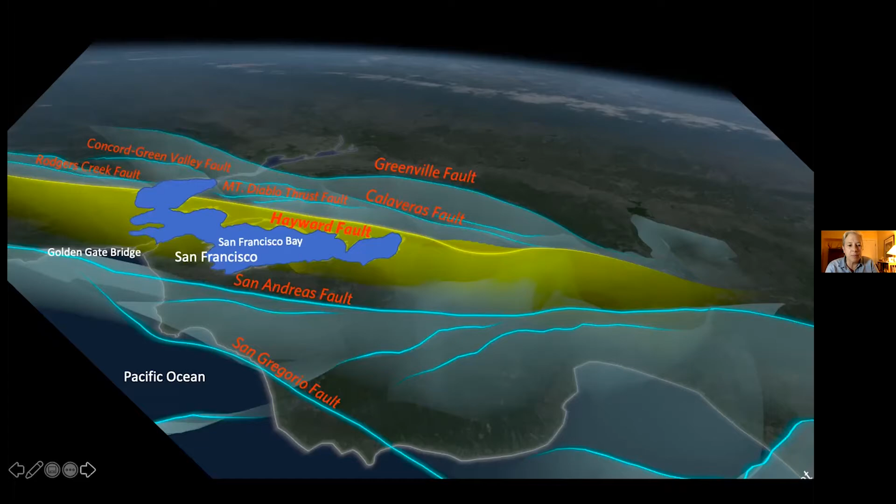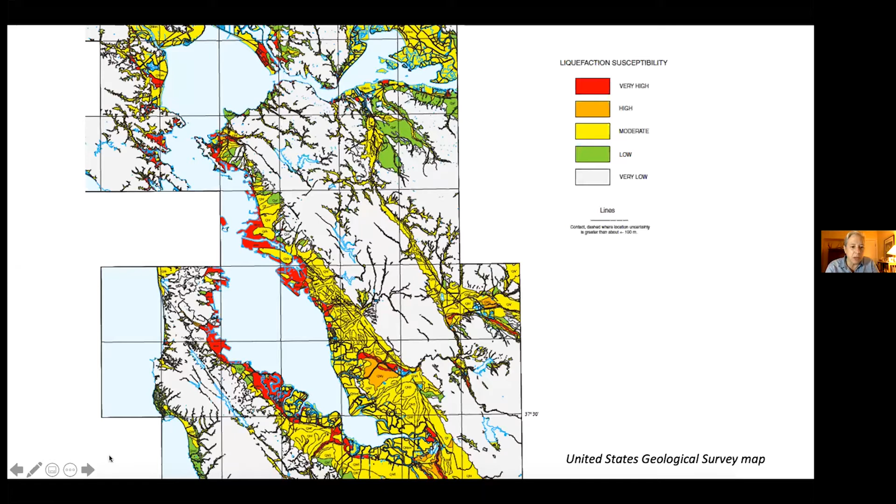That's what we're concerned about with rising sea levels and rising groundwater — that we may find ourselves in a situation where the soil behaves like a liquid. As sea level and groundwater continue to rise, more and more areas could be affected by this dynamic. Sorry, I'm trying to move forward here.

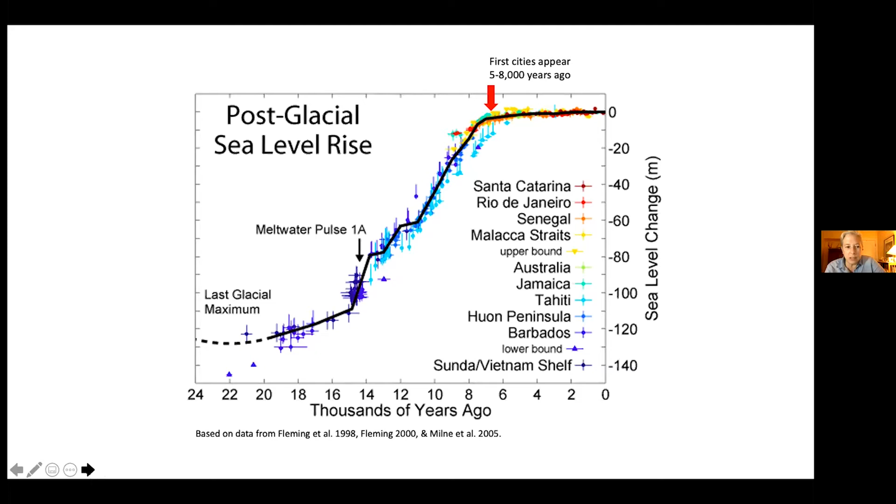So we've never actually operated cities during a period of rapid sea level rise, even though rapid sea level rise has occurred before. We're trying to figure this out, and no one really exists who can give us a lot of advice about it. It's difficult, and it's something humans haven't had to do before with cities. This is the guidance the state of California has given public agencies about how to think about sea level rise, and it's different from the guidance given in most European countries that I'm aware of.

We believe we're pretty much committed to that based on how much CO2 is in the atmosphere. The question is when will we get there. So they say permanent investments should assume the scenario of 1 meter of sea level rise by about 2050.

Smaller investments could use the medium-high scenario of 1 meter by 2068, and low-cost, temporary or very short-term investments like a path or a new public toilet in a park could use a low scenario of 1 meter by 2096. This helps give context, since not every country uses the same estimates for sea level rise, and in the United States, each state gives guidance for what public agencies should anticipate.

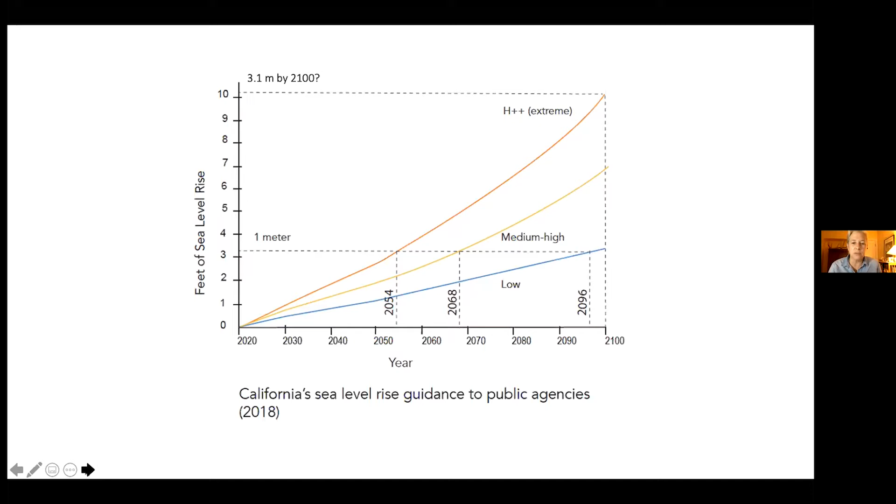What's interesting is that these two marsh grasses have hybridized—they've combined, reproduced, and fertilized each other, producing a daughter hybrid plant that's more vigorous than either parent, which isn't unusual for hybrids. This creates a taller, stiffer, stronger marsh grass. This hybrid has been 95% eradicated, removed physically and with herbicide treatments around the entire 1,000 miles of the Bay Edge, because of a kind of ecological purism about what species are characteristic of the region.

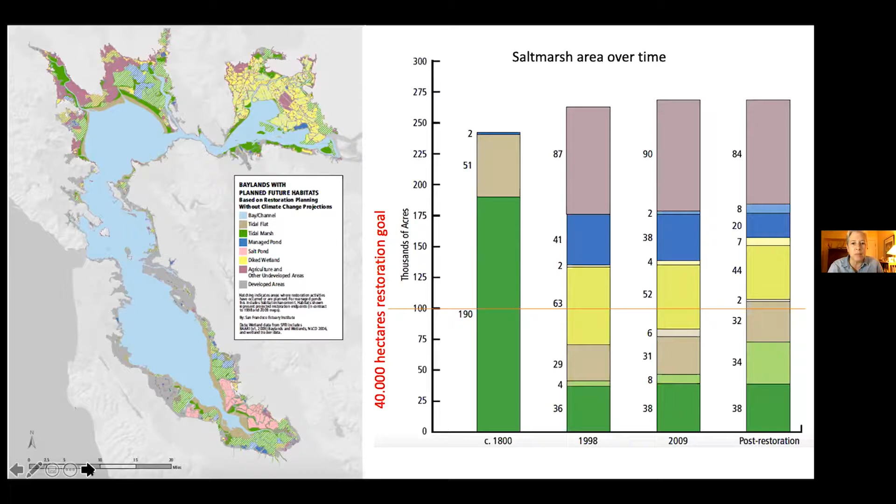Now I want to talk about groundwater rise, which is a big concern here because of its association with liquefaction, as well as other kinds of flooding. I'm sure you're talking about this to some extent also in Denmark.

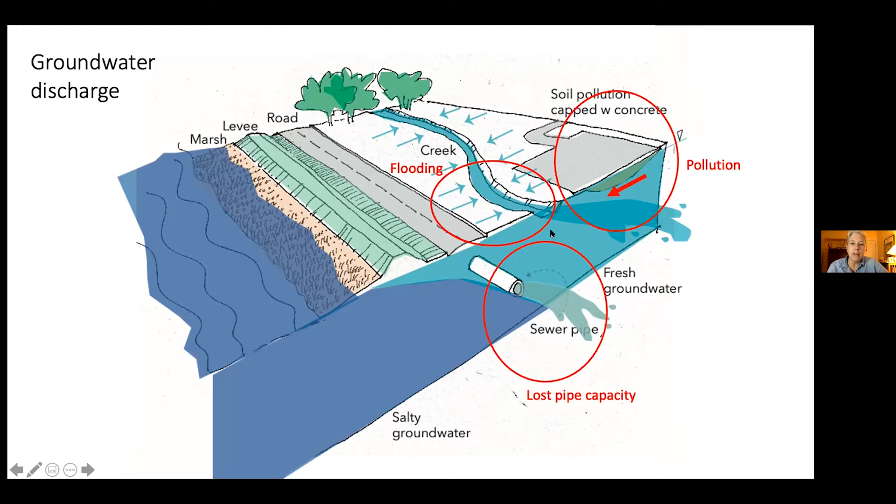So all of this will happen: the lost capacity in storm sewer pipes and sanitary sewer pipes that carry human waste, the remobilization of cancer-causing soil pollution, the flooding in the creeks, and eventually emergence of that water as flooding at the surface.

This is all happening in spite of the fact that there's a dike along the water's edge, because without extensive pumping networks, there'll be no way to prevent groundwater from rising behind a seawall or dike. That's why there are extensive pumping networks in many coastal areas. There's no way this structure can prevent this deep and lateral dynamic from occurring, since this water comes from rainwater coming from all the areas uphill, and that can't be blocked.

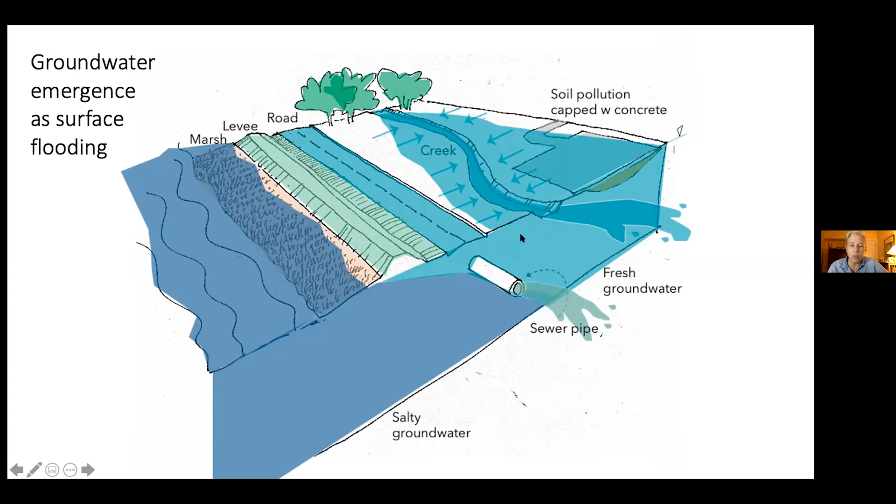We tell ourselves that this dry crust of land is going to stay dry, but in fact, it's not. As it gets wet, it's going to be very, very expensive to maintain, and systems—electrical systems, sewer systems—are going to begin to fail.

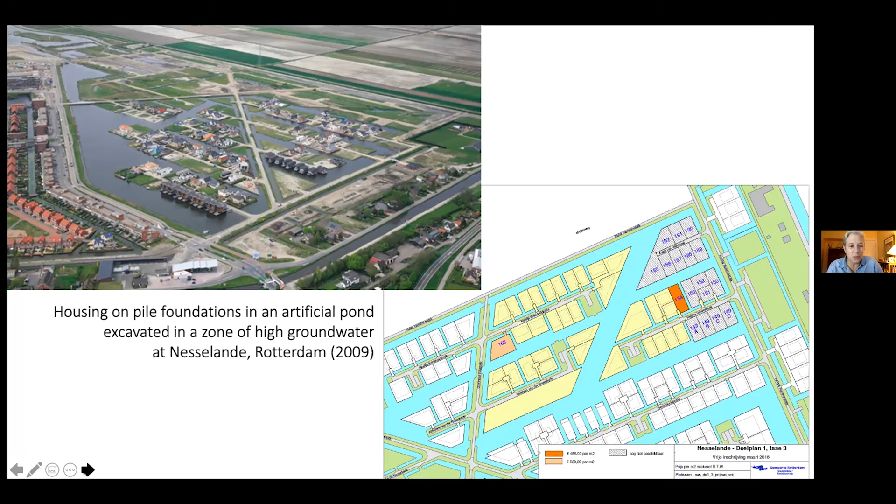It also puts the most secure and entitled people in a situation that might be a little more innovative. I don't want to say risky, but if they see a little crumbling in the dike, they are absolutely going to call someone. Whereas if we put innovative infrastructure in an area where people are poor, and it's a single mother with 3 or 4 children who works 2 jobs, she's not going to feel entitled to call and complain. So it's kind of the ultimate monitoring device to put wealthy people in an innovative infrastructure context, because they will absolutely call and complain if something seems to go wrong. So that may be an important insight for us.

So what we're thinking of, in a kind of cartoon version, is to excavate ponds and place that material at the wetland edge to add to the elevation of our wetlands. Dig hole, make mound, but also allow canals and moats here, and then float modular buildings in these areas, which otherwise many districts along the bay are going to lose value completely.

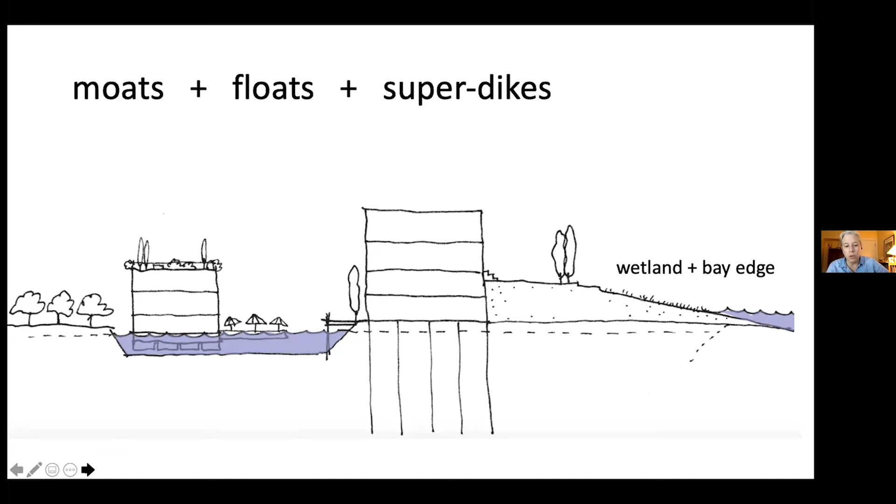We're looking at the Dutch examples because they represent a way of living with high water. I'll show you a quick video of how we talk to the public about this—an example of a student using claymation in one of my classes.

We might excavate these two, three, maybe four meters to build floating foundations of shared decking—not individual units floating, but a shared deck—and then modular units placed on that shared decking for new residential districts, with a pedestrian pathway around the district.

We think these kinds of strategies may work for many parts of the Bay Area edge. This is the drawing we used in a professional competition to explain: we're talking about not just one pond, but a mosaic of tidal ponds, like a honeycomb spread out—lots of ponds, a network of them, an armature of dikes surrounding these excavated ponds.

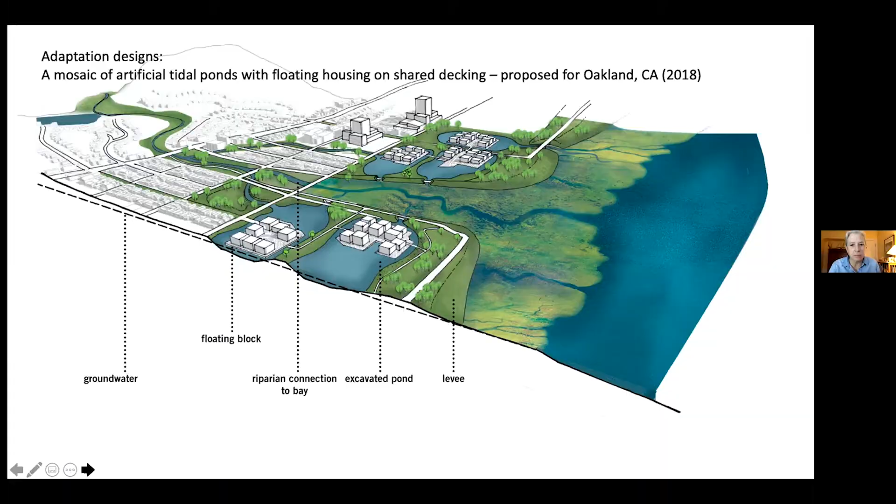This is another illustration of a similar situation, where there's already a long dike and a wetland on the outside of the dike and pump stations on the inside. Here we're talking about adding density as we add this floating district.

The student was showing even a floating soccer field here, which I don't know if we could actually justify the cost of, but it would be fun. And then we'd be providing habitat for an unusual bird that lives in the marsh, and also other species like the salt marsh harvest mouse, which is federally endangered.

So we're trying to figure out how to maintain this biodiverse edge, how to provide continued housing in an area that's going to turn into a soup without causing subsidence, and in a way that prepares us for earthquake events.

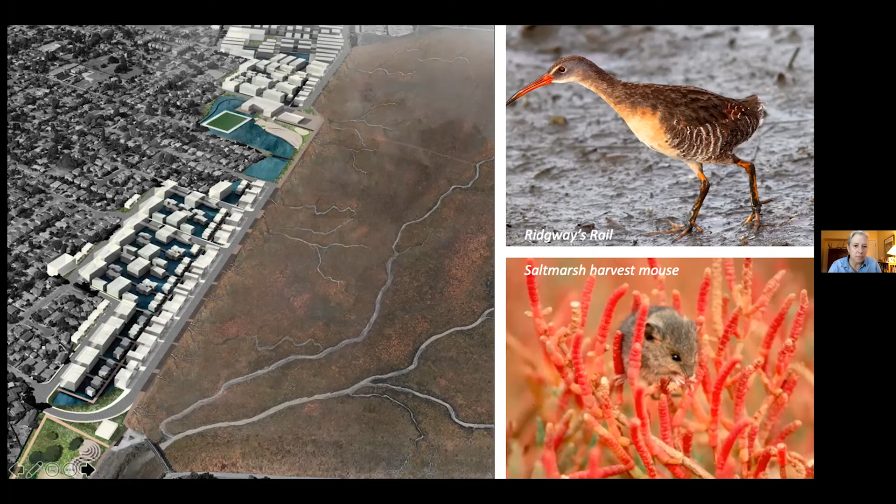This is another example, one we entered into a competition in 2018. It shows the excavated pond again, the high water table, the floating modular units on shared decking. Here are some buildings that would probably have to be more like 15 or 20 stories high to justify the cost of very expensive pile foundations that would prepare them for an earthquake.

When we show these images in the context of the places at risk around the Bay Area, right now the places that face the most risk are filled with lower-income people who, because of systemic racism, were forced to live in these areas that used to be industrial. They weren't allowed to move to other neighborhoods, which were maintained as white neighborhoods.

That segregation, that housing restriction, left a lot of people who are still low income and have less access to education and suffer more from air pollution of the highways that come along the Bay Edge, left them vulnerable to this rising groundwater phenomenon and the health risks associated with remobilized soil contamination. So this is a dynamic that's happening possibly today, underground, unknown, and unmonitored in our lowest income neighborhoods where African-American families live and Latino families.

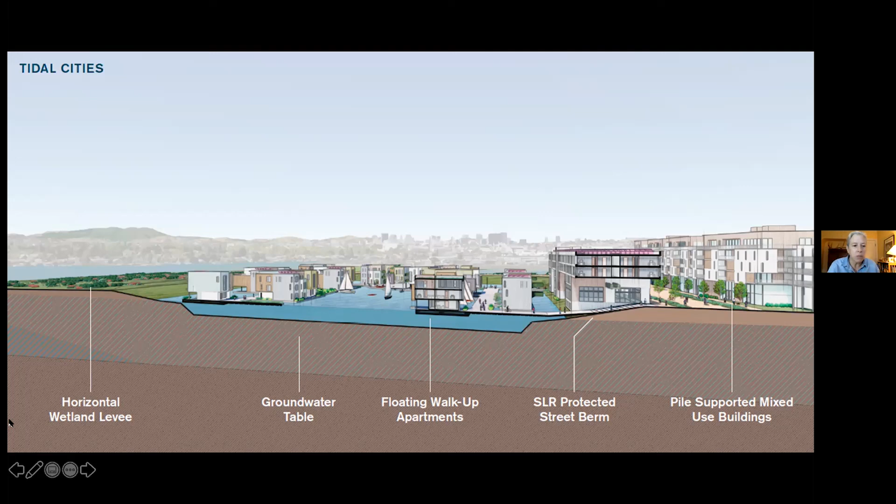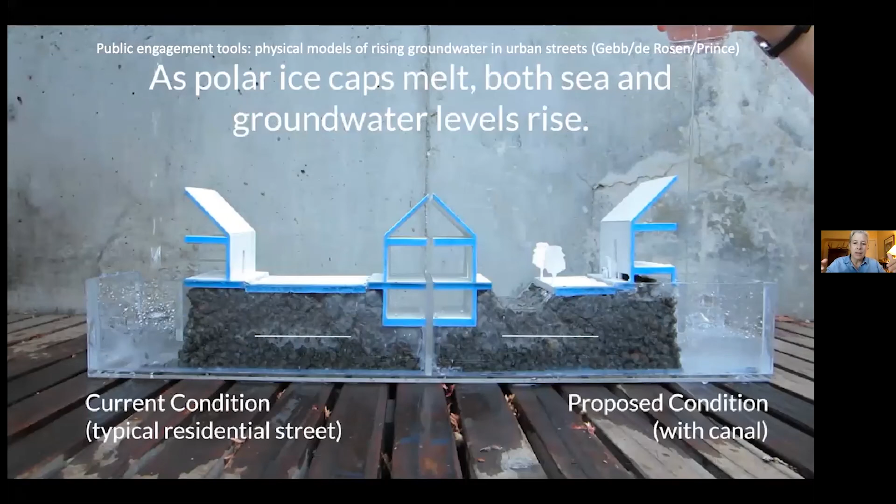So one possibility is that we would add a feature to this design. I'm going to show a very simple idea, but again, a physical model that we use to talk to public audiences. This is a section model that shows ice melting on the two ends, and we're going to see the groundwater rising in the middle.

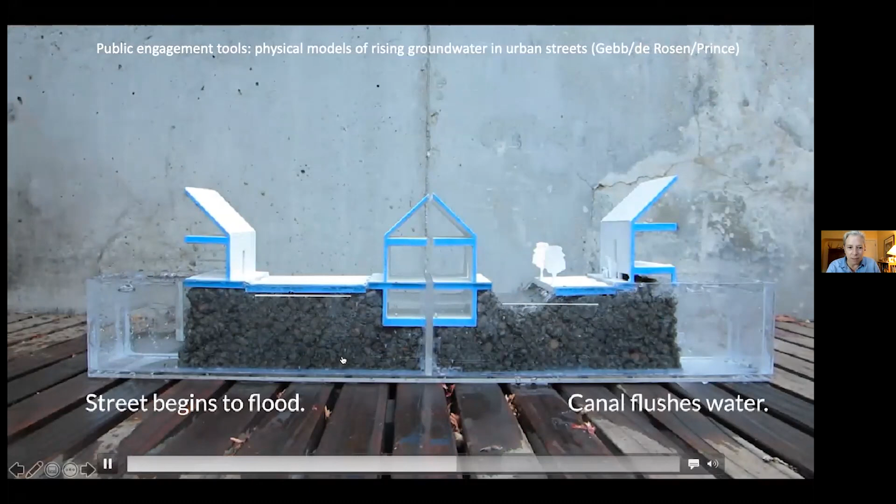This is a line that represents the water coming up inside the model. On one side, there's a conventional street. On the other side, there's a canal and a street. There's a little hole in the plexiglass here, and as you see the water rise, you'll start to see it trickle out here. That's what's happening there. The groundwater stops rising in spite of the fact that the water is rising still on this side, with the same amount of water being introduced into the model.

So we're trying to explain to people how canals work, that if you have a canal, you can keep the groundwater table a little lower under existing housing. That's a real key to coming up with a way to adapt that recognizes the economic differences that we've created through systemic racism in the United States.

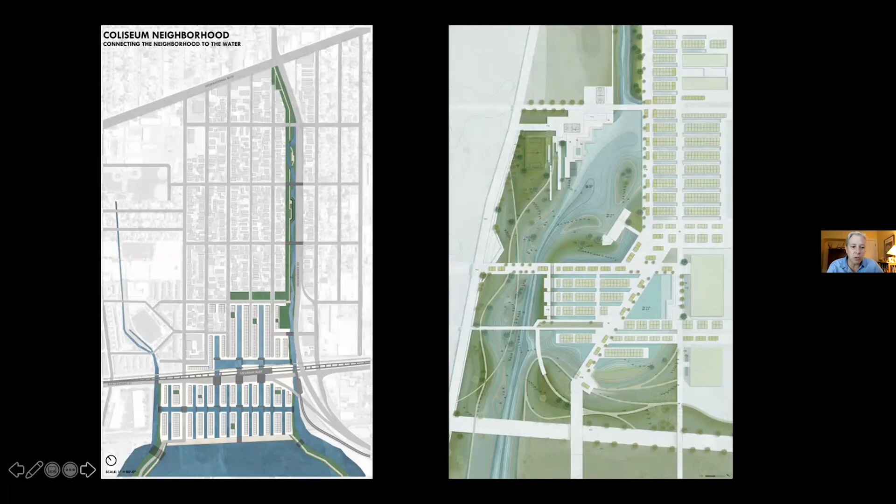So what we're thinking about doing here is coming up with a floating district that would be potentially at market rate, and then using canals to protect existing housing in low-income neighborhoods on the back side of those floating areas. And this is a rail corridor. We're also talking about putting highways in tunnels or elevating them, but that creates new problems. So it's a complex knot of different infrastructure, but the basic strategy is to adapt in place and maintain the value of land in our region by doing a mix of canals and this floating housing.

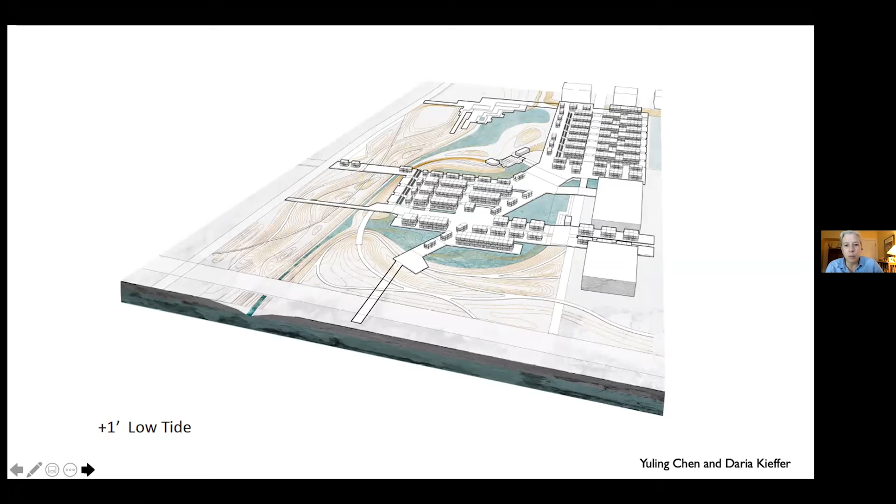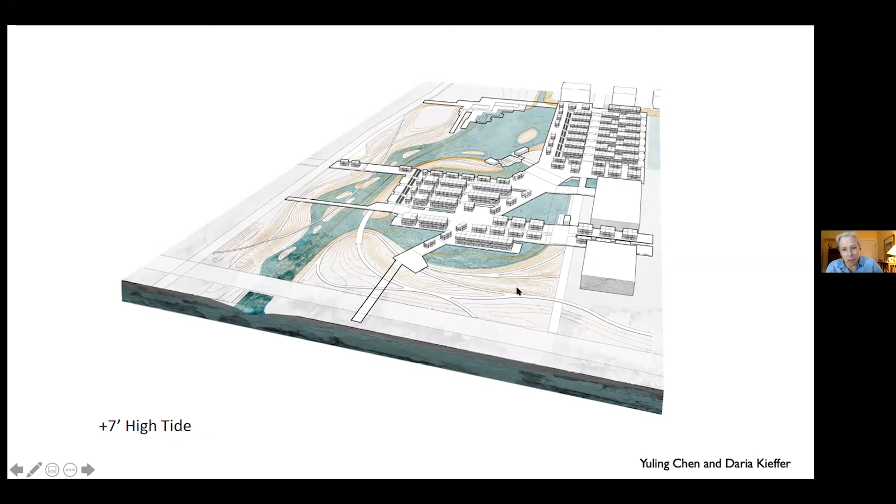I'll show you what our thinking is at this point about how this is going to change over time. So here's an example of floating housing on shared decking at a typical low tide today, a typical mean tide, and an unusual high tide, today's unusual high tide. You can see the edges begin to fray a little bit, depending on how high the dikes and levees are. As we get more sea level rise, so as we get to about 1 meter of sea level rise, we think this would all work in the same way, even though it's beginning to be inundated in the surroundings.

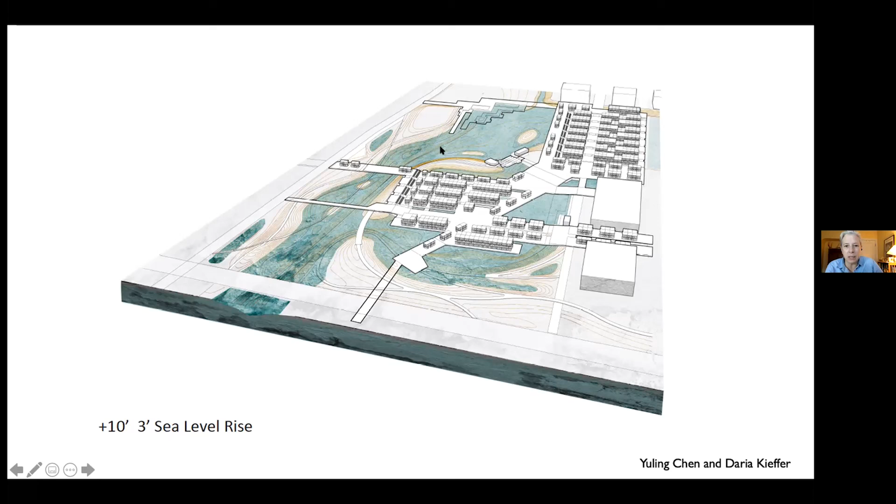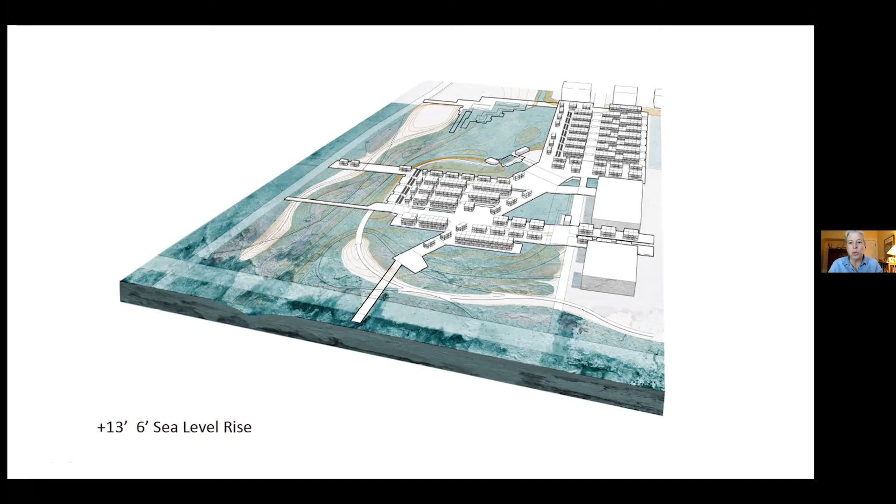But as we get to 1.5 meters to 2 meters of sea level rise, we think that these dikes and levees would need to be a lot larger. That's the point where we'd have to ask ourselves, is it worth continuing to maintain these ponds, or should we relocate them at about 2 meters of sea level rise?

What we're talking about for that relocation is that there might be an initial band of ponds and canals or creeks headed to those ponds, with wetlands on the bay edge. Now we're looking, this is the land side and this is the San Francisco Bay side. In our first phase, we would start with one band of ponds along the edge and then excavate a second band of ponds and turn this first band of ponds back into wetlands.

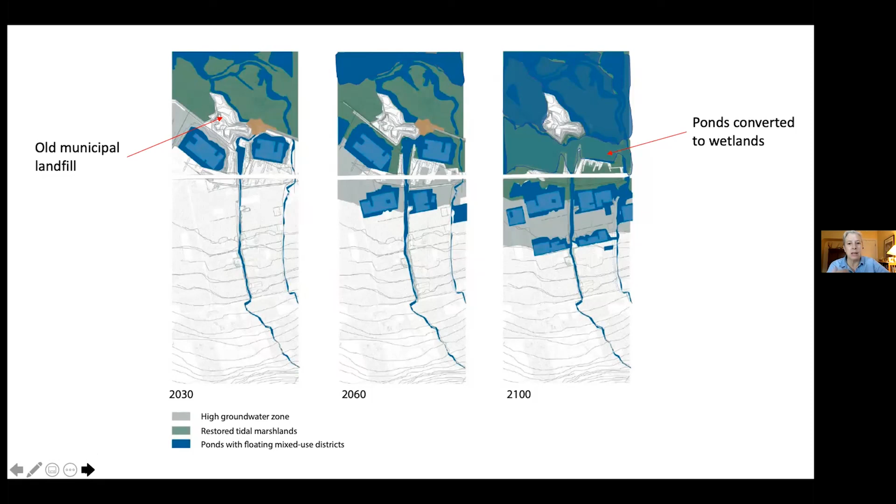Because by then, our original wetlands, we won't be able to raise the surface any higher, and we'll have to abandon that first band of wetlands and start moving in, like planning to roll up the carpet as we go. So in the end, it is a retreat strategy, a managed retreat strategy, but for the economic values that we could maintain for the next 50 to 100 years, it's an adaptation in place strategy.

I hope that makes sense. I'm going to close with this slide and open up for questions. Thank you for listening. I appreciate it, and I'm excited to hear what your thoughts are.